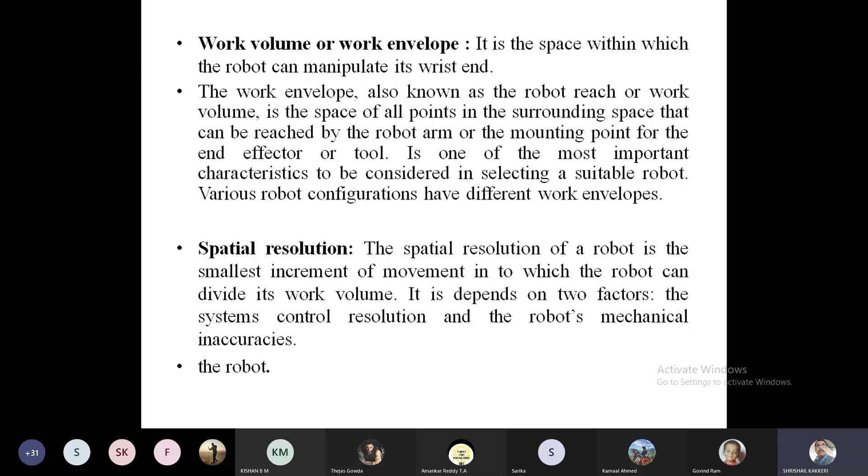Now here, all these I am not going to take in the beginning. I will be taking only the work volumes of the robot. Now, you take any robot. Basically today you can find in the industries robots which are engaged in assembly operations, painting operations, welding operations, and they'll be just like a servant for some of the automated mechanisms or machineries. Therein they'll be working like a worker, and they'll be used as a security guard.

They'll be used as entertainment toys. They'll be used as doctors for teleoperated operations. And they'll be used in underwater excavation. They'll be used in space applications. You take anywhere, and there basically we have two types of robot. One is a mobile robot, one is an industrial robot. Please do not get confused.

The mobile robot is one which will be having wheels and legs. That category will be different. I am talking about the industrial robot. The industrial robots will be engaged in any kind of jobs, maybe pick and place to any complex assembly operations as per the definition of RIA. Those robots will be falling into four important categories. What are those four important categories?

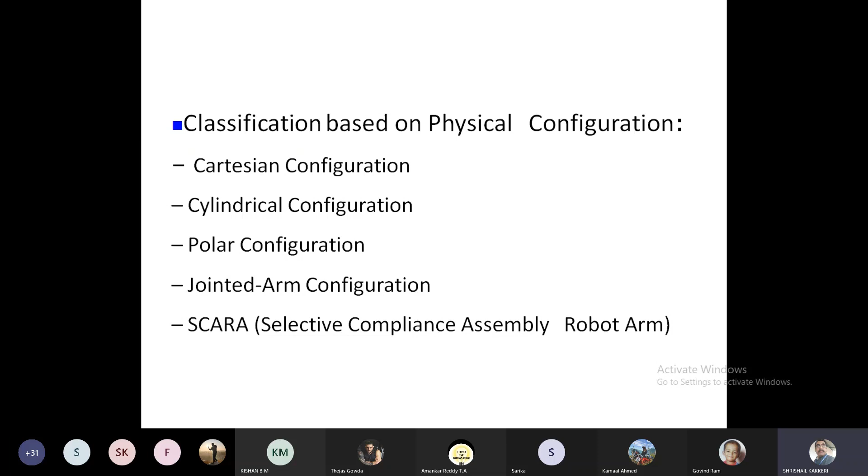And why I have taken these in the similar sequence, you'll come to know. The Cartesian I have taken first, the cylindrical next, polar next to that, then articulated next to that. Articulated resembles the human arm. It is called the SCARA robot, selective compliance assembly robotic arm. Now let me take the Cartesian robot. Why is it called a Cartesian robot?

The work volume generated by these robots will be in the form of a rectangular shape. You can look into this shape. This particular shape will be in the form of a rectangle, so these are called rectangular configuration robots. What is the work volume or workspace of the robot? A simple example you can see.

You just stand and stretch your hand. Turn around your body, and an imaginary cover or envelope generated around your body will be the work envelope. That means within this you can flexibly work. If you go to a hotel, the server will not be giving the food to another table. He will be giving it to your table, because you can stretch your hand and eat. That is your work volume. Within your work volume, you can flexibly work. In the similar way, the robot can flexibly work within its work volume.

The work volume generated by these robots will totally depend on their physical structure. So the physical structure of the robot will be deciding the work volume, and based on this work volume, we give the name Cartesian coordinate robot. As the name indicates, the Cartesian robot can move linearly along the X, Y and Z directions. The Cartesian coordinate robot can move linearly.

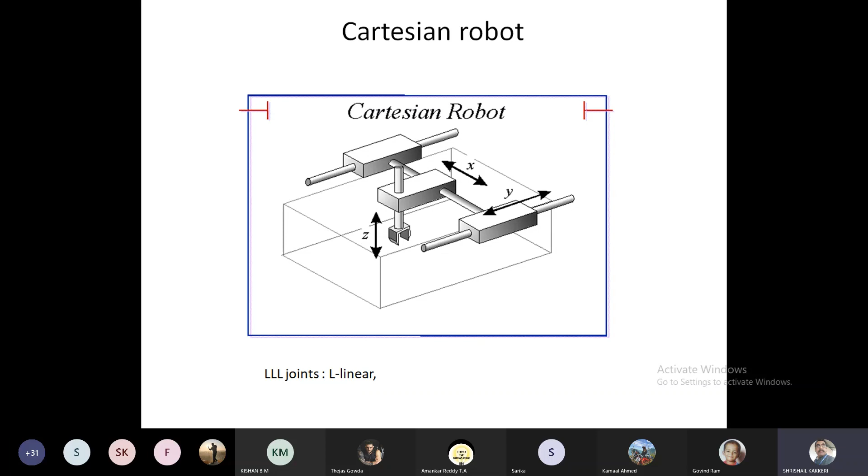along the Z direction it is linear. And where can it be used? Since it has only linear joints, linear manipulators, there will be slight restriction in getting complicated jobs done. So this will be used only for machine loading and unloading operations. And along with this, for all the robots, you can write pick and place. Pick and place is the basic work which a robot has to perform. This is what I want to discuss. Then next, let me come to the cylindrical coordinate.

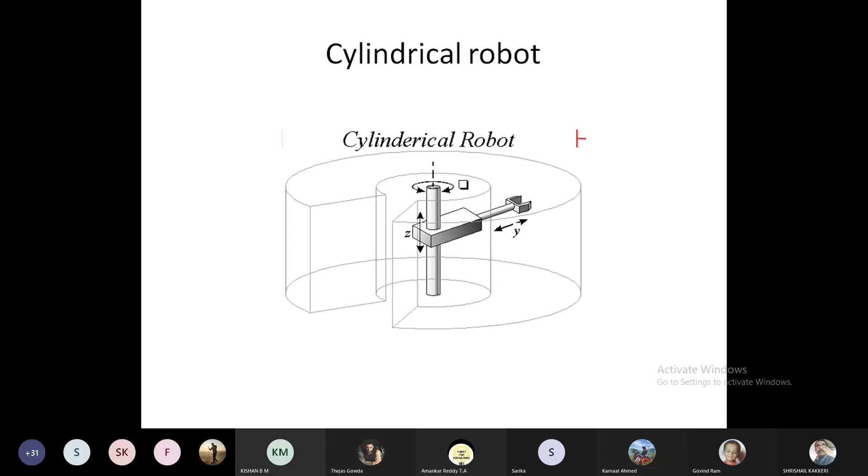So these will be used for loading and unloading and pick and place. It can do simple jobs like simple machining, simple painting and simple welding operations. This is about the robot: 2L and 1R. Now let me come to the spherical or polar robot.

A spherical or polar robot will have one linear joint and two rotational joints. The work volume generated by these robots will be in the form of a segment of a sphere. Take a ball and cut off some portion of it; that will be the work volume defined by this robot. Since it has two rotational and one linear, it can do more complicated jobs compared to the cylindrical and Cartesian coordinate robots. It can do painting and welding operations along with the previous pick and place and machine loading and unloading operations.

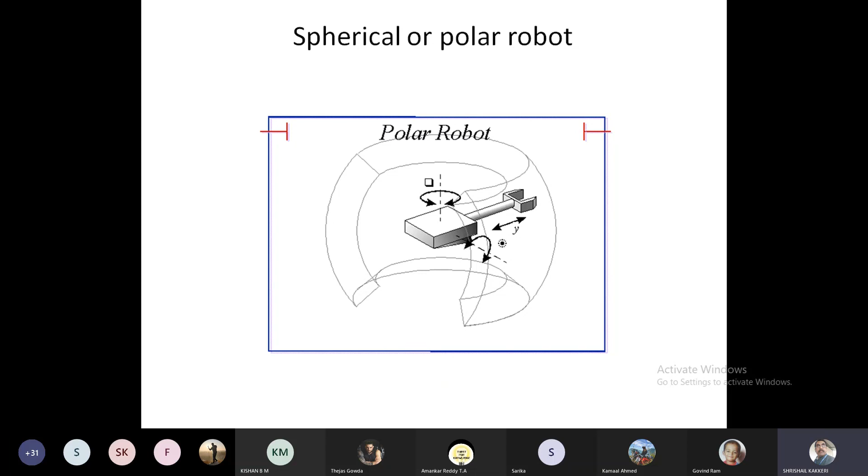Here the coordinates will be r, theta, phi. Two rotational will be there; theta and phi I have taken. For the first one the coordinates will be x, y, z: linear, linear, linear. The second one is r, theta, z: linear, rotational, linear. The third one, spherical, is linear, rotational, rotational, L, R, R, that is 2 rotational and 1 linear. That means it can perform slightly more complicated jobs compared to the previous cylindrical and Cartesian robots. Now let me come to the jointed arm articulated robot.

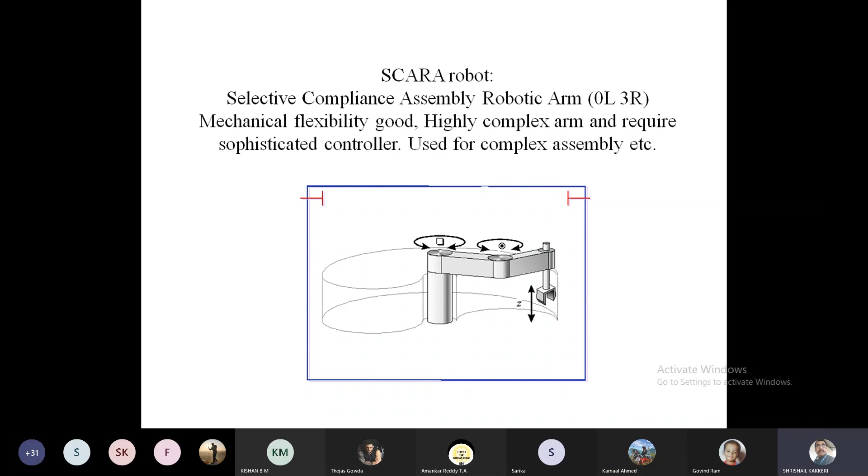The jointed arm articulated robot may be vertical SCARA or horizontal SCARA. If this particular arm is horizontal, it will be called horizontal SCARA. If the arm is vertical, it can be called vertical SCARA. It resembles the human arm. You can see here, this will be like the shoulder, the elbow, and the wrist end. Since it resembles the human arm, it is called an articulated robot arm, and it will have all rotational joints. So 0 linear and 3 rotational: rotation along the x direction, along the y direction, and along the z direction.

The work volume generated by this robot will be very complicated, and it doesn't have a defined shape. The first one had a rectangular shape. The second one had a cylindrical shape. The third one had a segment of a sphere. The fourth one doesn't have a proper shape at all. It will be very complicated because all 3 joints are rotational. This robot can perform whatever complex job it is. If this robot cannot do a program or function, the remaining 3 cannot do it. These are the 4 important physical configurations of the robot.

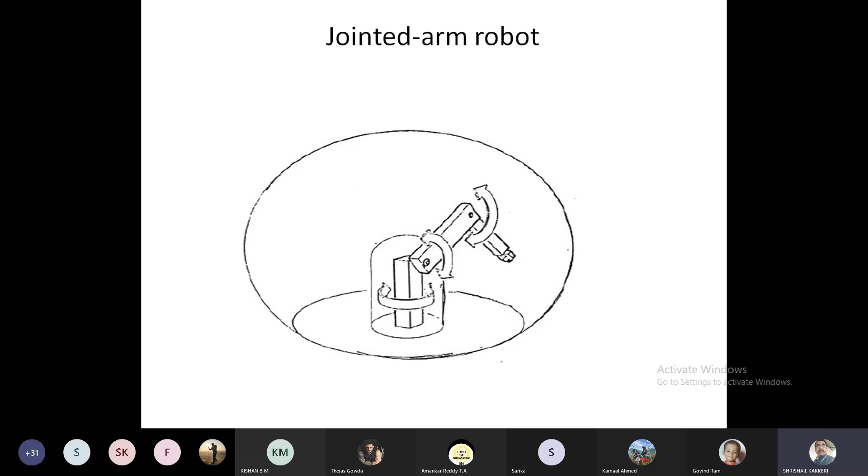And now I have made some list here. You can see them. Explain the